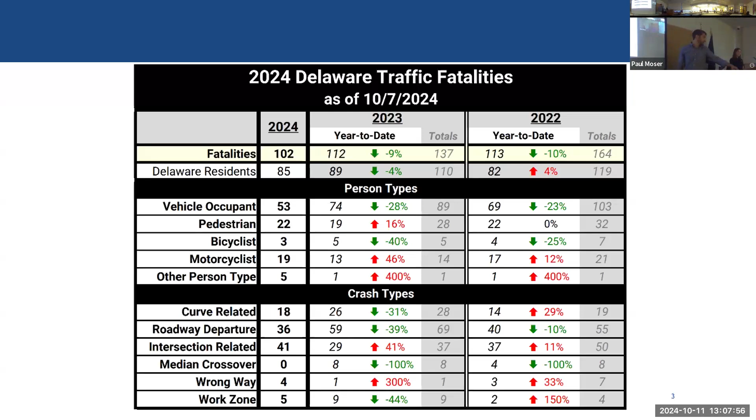We've had 102 fatalities so far this year, which you could say is down 10 from previous years, but that number fluctuates. It's still 102 people who didn't plan on dying or being seriously injured or maimed, just going about their daily life, and that happened as a mix of human factors, social factors, and our transportation network. So what we're trying to do, especially with plans like this, is think about what we can do in the infrastructure realm to not just focus on reducing fatalities and serious injuries, but even smaller crashes and things that can make people's lives better.

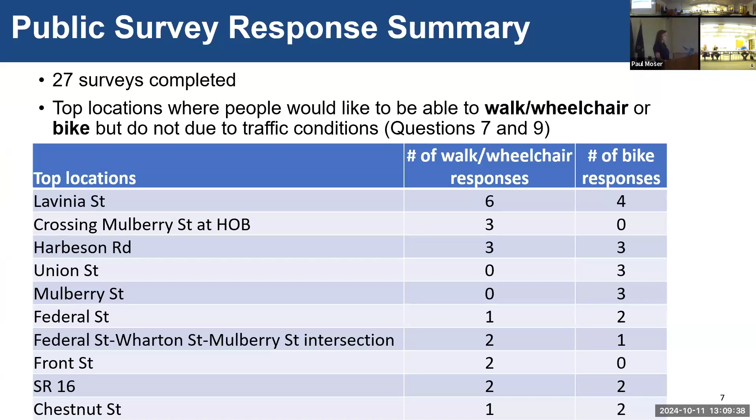Here is some of the other feedback we got from the conversations at the workshop, comment forms, and the more open-ended questions in the survey—some of the more frequently mentioned topic suggestions. A lot of concern about traffic speeds and wanting traffic calming was our top issue.

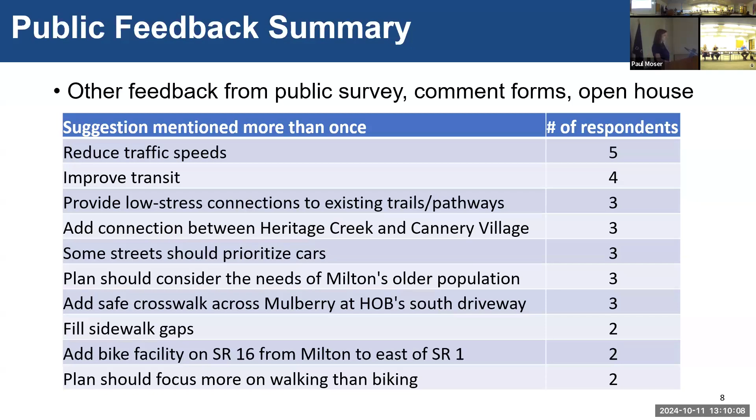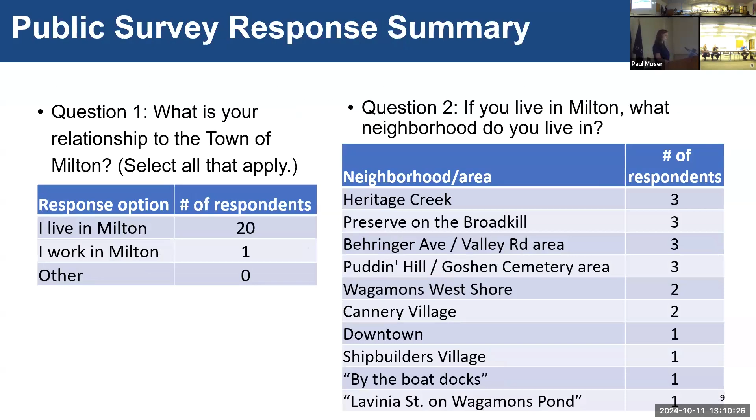We are going to be posting this online, so I'm not going to go over all the survey results, but you guys can look at them on the project website. I have the rest of the questions laid out here, but I'm just going to go through them—if you have any specific questions we can look at them, but otherwise, for the sake of time, we'll skip over them.

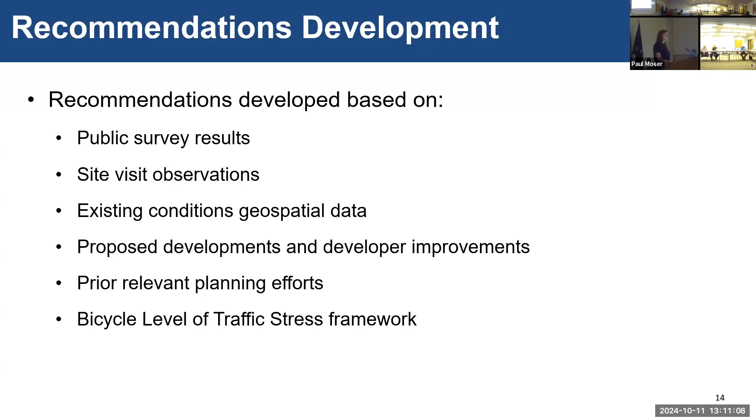So, as I mentioned, since June, we've been developing recommendations. Those recommendations were based on the public survey results, site visit, geospatial analysis of various existing conditions data, such as level of traffic stress, which we talked about last time. Proposed developer improvements that are coming along with incoming development that relate to bikes and peds, and prior relevant planning efforts, and the bicycle level of traffic stress framework basically drives how we form our recommendations to make sure we're creating low stress systems.

With that, I'm going to turn it over to Leah to talk about some of the key terms. Thanks, Jenna. Who has a poll going on who trips first? It's not gonna be me.

All right, so key terms. We went over this a little bit last time, but before we get into our network map, just wanted to review what we're talking about. Last time we met, we talked about level of traffic stress, and basically that is a way we can assess how stressful it feels for any of us to bike on a given road.

Now, obviously, all of our tolerances are different, right? I bike often to commute, and I'm gonna ride on a busier road because I'm comfortable with that. But what we want to ensure is that most people can use the bike facilities we're proposing. And that means we're going to err on the side of more protection so people feel safe.

Now, we may hear from your neighbors, residents, well, yeah, I live on a neighborhood street, but speeding's really a problem, right? So it's a low stress street, except for the fact that I have cars ripping down my street going 45. And that's when we would come in and say, okay, maybe we need a little traffic calming to make sure that people are obeying the speed limit, right? Because we can't have police on every corner making sure people do the right thing.

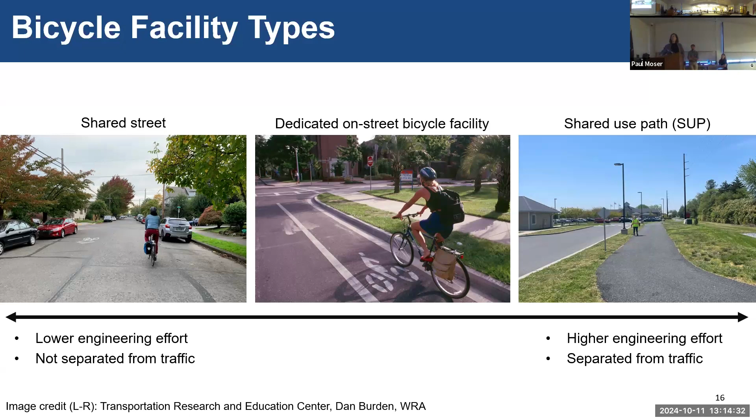And ideally, over time, that'll mean less car trips and less congestion, and easier to get around using alternate modes.

I mentioned low stress streets. There's a term we use called a bicycle boulevard, and that's basically how do we take those existing quiet neighborhood streets and make them a little more attractive or a more logical route for people. We'll talk about some places where that makes sense, and again that may not mean much other than some pavement markings, signage, and traffic calming. So we're talking about low intervention, quick build, easy to implement, inexpensive stuff that you can build on what you already have, because a lot of this town is already in pretty good shape.

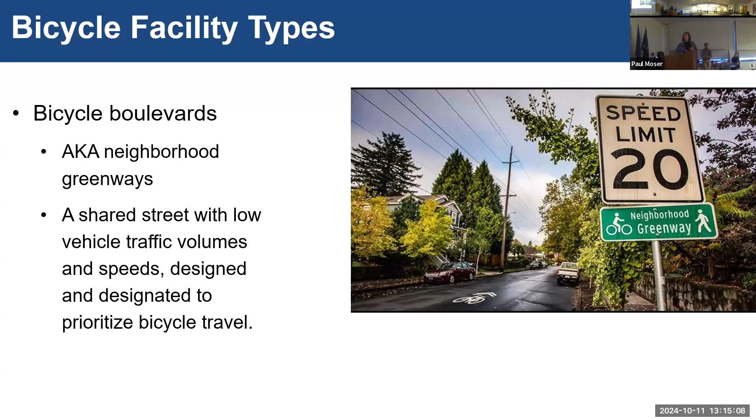Yeah, and you've done a lot of work in this space already. Both the state has a traffic calming manual, and the traffic calming advisory ad hoc committee put together a report, so there are tools in the toolbox we can use. There are tools that with Paul and his team's support at DelDOT we can explore that would be logical, appropriate options. Obviously we have a lot of state roads here, so we'll be working with DelDOT traffic and also maintenance and operations. We want to make sure that what we're building is able to be maintained over time, and able to be, you know, plowing is always one of those things.

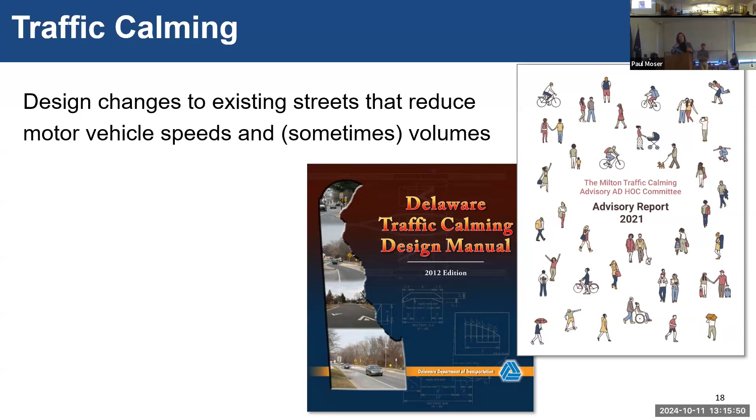So I'm glad to see there are some folks today from the town to speak to some of that. Now again, our goal here is not to make things inconvenient for cars, it's to make things safe for everyone, whether you're driving, walking, or biking.

Randy, you were sharing you had a near miss. I think we've all been in situations downtown, even coming here - one car flew right past us on the sidewalk, on the crosswalk, while another yielded nicely. But how can we work together to make sure people are more compliant, slow down, and respect everyone else in the street? Really, the reason we want to slow down traffic is safety.

That bottom chart there, I think, is really important. Now hopefully we don't have too many people in town traveling at 58 miles per hour, but when we're talking about those high speeds, even above 40 miles an hour, there's a 50% chance you're going to die if you get hit, if you're on a bike or walking. And that force of a car striking at those speeds is huge. But if you can get those speeds down closer to 30, and ideally even below 30 into the 25, 23 range, that's a lot better.

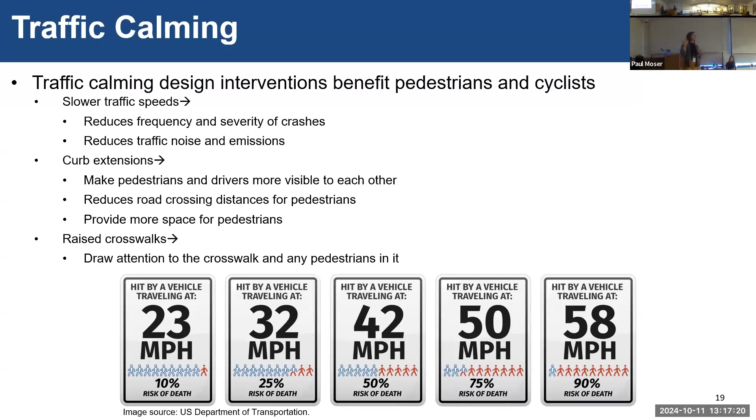Now this is an average, right - for people who are old, it's worse; for people who are young, it's worse. This is kind of your average statistic for risk of death. But again, Paul spoke to the state's statistics - this is a major effort statewide to make things safer for all of us as we're traveling on our roads. And one other thing we don't think about: it's a risk for those of us walking and biking, but who of us who drive, which is probably everyone in this room, wants to live with the burden of having seriously injured or killed someone on the roads? There are ways, things we can design, to reduce the risk of that.

So, talking about some improvements at crossings - that's going to be a big part of the challenge here in town. You may be riding or walking nicely along a quiet neighborhood street and then you get to a busier road. So how can we make those crossings safer? You've already done some of that in town with the artistic crosswalks and some other things, but there are other tools we can use strategically. Your local expertise on where these things may be necessary is going to be really important here.

Including high visibility crosswalks - you can see a raised crosswalk, kind of a speed table, there. More of a traffic signal light situation, or a rectangular rapid flashing beacon on the bottom, which may be appropriate where there's not a traffic signal already, or at a mid-block crossing location. And also a more physical change - curb extensions, which you see in the center of the screen there - whereby at the corner you're in a place where you shouldn't have on-street parking anyway, because you're so close to the intersection.

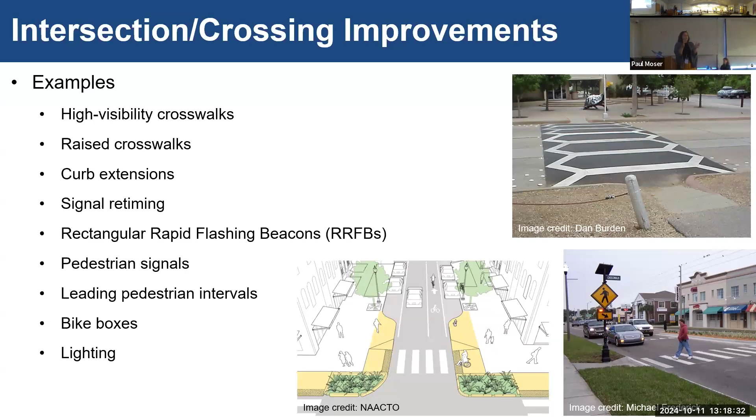You can actually build out the curb there to reduce the crossing distance and slow cars down as they approach that crosswalk, because the road tightens up a little bit.

So these are some of the tools in our toolbox that we'll be talking about moving forward. We don't want to do this in a vacuum, or like it isn't going to take something to build and maintain over time.

This is a map depicting maintenance responsibility. Red streets are the state's responsibility, green are the towns', and we have one little piece that's privately held. As we talk about what's appropriate for each street, we'll be dealing with local forces or coordinating with state operations and maintenance to ensure what we're doing works for everyone involved, with the understanding that money is tight across the board right now. We'll talk later about grant funding and sources of funding for some of these things.

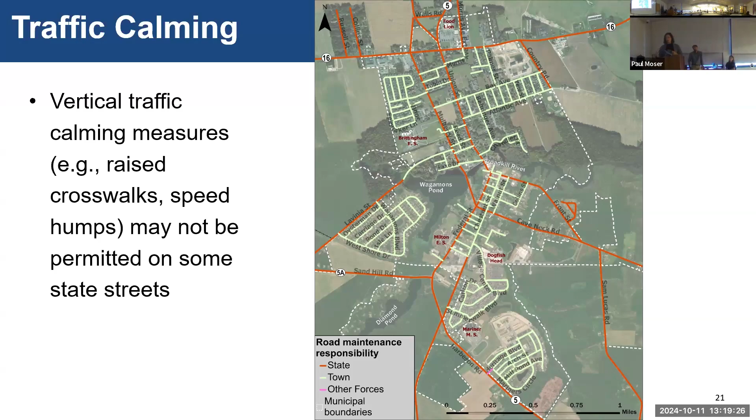And with that, I'm going to hand it over to Paul, who is going to speak to our preliminary recommendation.

So what we're going to present on today is not necessarily project specific. We'll be presenting very project specific details and concepts at the first public workshop in December. We're still kind of working on those. What we're going to talk about today is more of a broad framework we've developed for this analysis.

This framework is geared originally towards cycling. You'll see we talk a lot about cycling here, but there's also several pedestrian oriented recommendations, and they overlap almost completely. Most of the places we're recommending some sort of cycling intervention would also be beneficial, or explicitly have some other improvement, for pedestrians.

So we use this framework of level of traffic stress, looking at low stress streets and seeing how do people get around, how could they get around, and what are the deficiencies in a complete connected network?

So we came up with this theoretical framework saying this could be a connected network for cycling around the town of Milton. All of these lines you see here are colored based on having a link that goes all the way up or down, essentially forming out a grid.

Because travel is pretty random - people from somewhere want to go somewhere else. It's impossible to actually plan where they're going to go. So the idea is we want to develop over time redundant travel options for people to get around town. Each of these would represent a link in the grid that long-term would have some sort of lower stress bicycling facility or countermeasures for traffic calming and pedestrian safety.

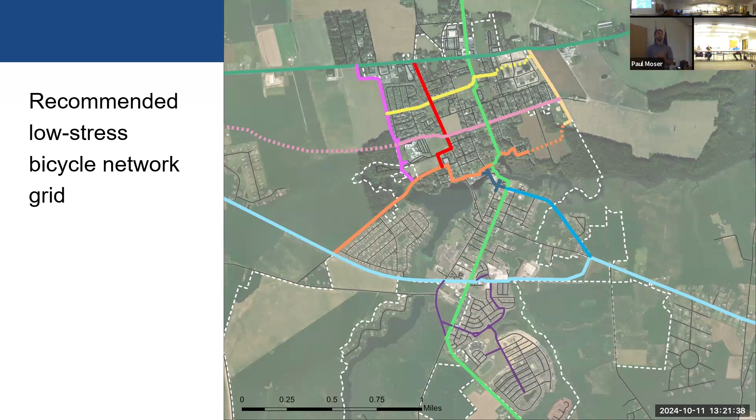So we're going to go into a little more detail and highlight a couple of these different things, talk about what they look like, get your imaginations going. This isn't exclusively what we're recommending - we have a couple other project recommendations that aren't part of this grid, which we'll go into at the public workshop. We're also looking for feedback from you guys on other specific things to hone in on. We got a lot of feedback from the first public workshop that we're going to incorporate.

But before I move on, does this concept make sense to you guys? Do you have any questions about this or what we're trying to convey here?

Yes, I see what I think are broken lines, and there are areas that indicate there are no existing roads, but generally private property. Yes, speaking about the private property.

For sure, so that was for future development scenarios, right? As you guys know, there's a ton of development over on the northwest of Milton. That's going to be, I think it already has plans in plan review, right? So if there's an opportunity to coordinate with the town to get connections to that new part of town, you now have a low stress route to access those land uses for people inside town. So roads here actually on the east side of it.

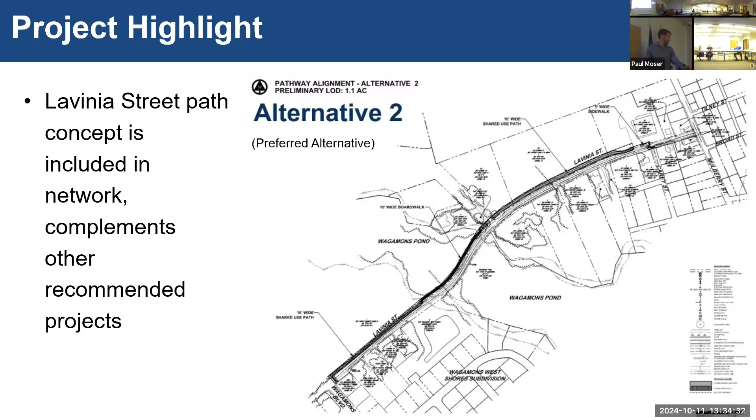Yes, Leah? George, we have you, I see you raised your hand. You want to come off mute and share? Yeah, I do have a question.

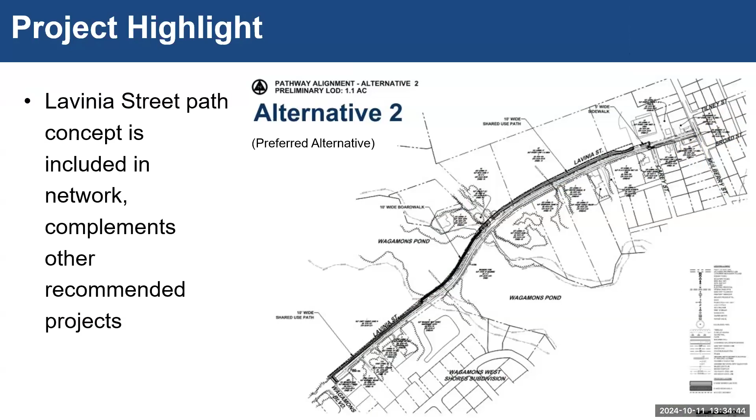On the map that shows the potential bike paths, it doesn't seem to be connecting to what would be the generators of bicycle use - the schools, the parks, well, perhaps the parks, but the shopping center, things of that nature. I mean, the things that generate a bike trip.

Yeah, for sure, the things that need to be connected by a bicycle network - and I'm not really seeing that on here. Yeah, George, so this was more of a grid concept versus the local connections. I'd said earlier that there's going to be other project ideas and recommendations that are more specific, but this was kind of the easiest way to communicate this concept. We're eventually going to map further towards the development of this plan that's going to have those specific connections.

To some extent, the idea is that a lot of the local roads are perfectly fine to walk or bike on. They have sidewalks, they're pretty low traffic speed. Really, these are supposed to act as the connectors across town. These are like the collectors in a sense.

We didn't want to say every single road is part of this. It just gets overwhelming, so this is kind of a distilled version. It's more of a schematic, if that makes sense, than the final plan.

Ultimately you'll show some kind of connections from this grid pattern to what actually is generating the need for the trip, like the connections to schools. Now, some of these we're gonna have pretty detailed concepts for, but a lot of the other projects are gonna just be like a point that says 'improve intersection at Milton Elementary School,' that kind of stuff.

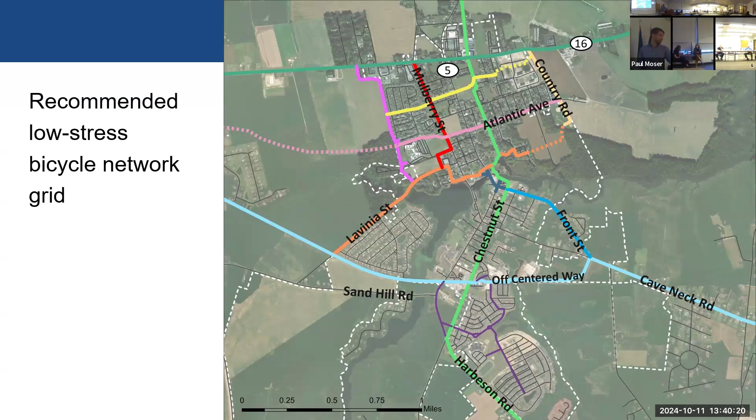Thank you, George, for that point. Okay, let's keep rocking.

So Lavinia Street is a project that already has a concept developed. One of the ideas, and this is one of the higher end engineering effort ones, was Mulberry Street. Obviously Mulberry Street and Union Street are high traffic - Union Street is very, very tight. Mulberry Street, just from first glance, it looks like where the sidewalk is on the southbound side, you could probably fit a much wider pathway that has a buffer versus just a regular 4-foot sidewalk. You could do some improvements to some of the intersections, and that could tie in on the bottom to the proposed project at Lavinia Street, come up to the school, and then get you up to the shopping center. Again, a relatively expensive project, but that's kind of what my section does.

We spend a lot of time and money on this exact kind of project, taking places that are sometimes 2 or 4 lane roadways and putting these 10-foot asphalt pathways next to them, sometimes 12-foot. They can make a big difference for both safety and people's comfort on those roads, making it safer to bike and walk. I'm doing a $12 million project like this in Dover right now. The state DOT and US DOT do allocate funding for these kinds of projects, so we see it as a very big functional improvement. That's one idea - probably the most intense project on one of the major roadways, but it could be an improvement.

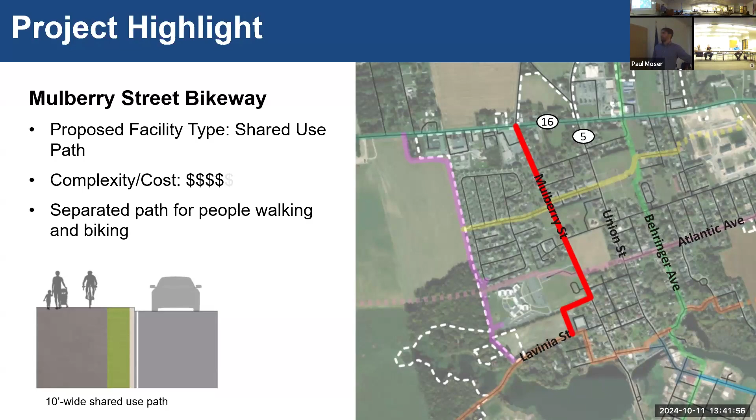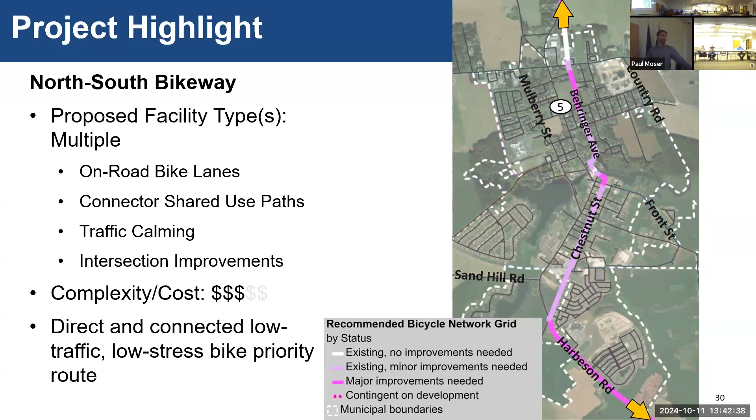Again, the sort of bicycle boulevard - if any of you have a fun name for this, we just have 'north-south bikeway' which is kind of dumb. If you guys come up with a nice way to brand this, it could be a really fun thing to have a name for. Maybe you have some dedicated sheet aluminum laser cut branding things on top of their street blades that are really cool - I'd like to have a name for it. There's all sorts of different things you can do. But yeah, it's the bicycle boulevard concept like we were saying - we already have a street that people are using. Let's connect it, make it safer, make the intersections better, make it more direct, and really focus not on just trying to put in a new facility, but trying to leverage what's there.

I think these are the more intense things. You want to talk about this? Leah put this slide in. I was gonna put this slide in.

Okay, so we talked about traffic calming a little bit earlier, right? I know some of you are very familiar with what traffic calming means and what kinds of things you can do, and maybe some of you, especially those online, less so. So this is just a high-level diagram from an organization called NACTO, the National Association of City Transportation Officials, that shows some of the things. I think what people think of most when you say traffic calming is a speed bump or speed table, in the upper left there. Now, we're getting into maintenance stuff, so what we can and cannot do on any road may differ, but another thing you can do is what's called a chicane, in the upper right there, which basically, instead of a car traveling straight down the street, they have to deflect. A speed bump is a vertical deflection - you're going up and over, and that's slowing you down. A chicane is you have to stop going straight and slow down to turn a little bit, right?

And similar concept down here on the left with the median island. Again, it just interrupts that straight free flow. Mini traffic circles have been very effective in some neighborhoods and can be pretty low cost. So for those of you who do not exist in the transportation space all the time, I wanted to provide a couple examples. Versions of these things exist in the Delaware Traffic Calming Manual, as well as the city's traffic calming committee's work, but this is just a highly graphical way to quickly show you what kinds of things we're talking about.

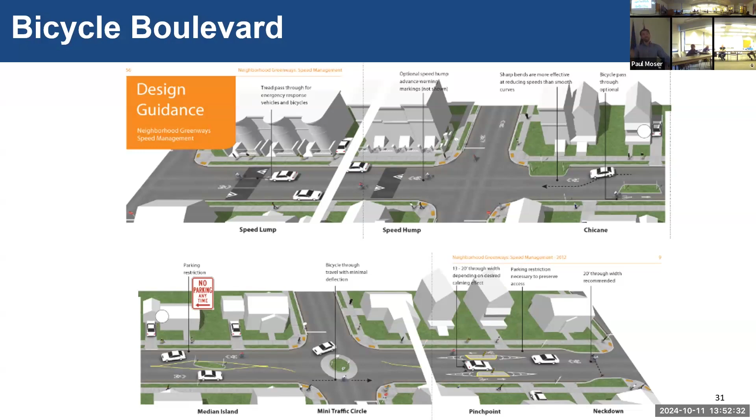So those are very successful. We have a spectrum of design, from really restrictive and effective traffic calming to so permissive it's almost worthless. So it's really about where you want to be on that spectrum, and making sure whoever's designing it is competent enough to do it and doesn't accidentally cause an issue like that.

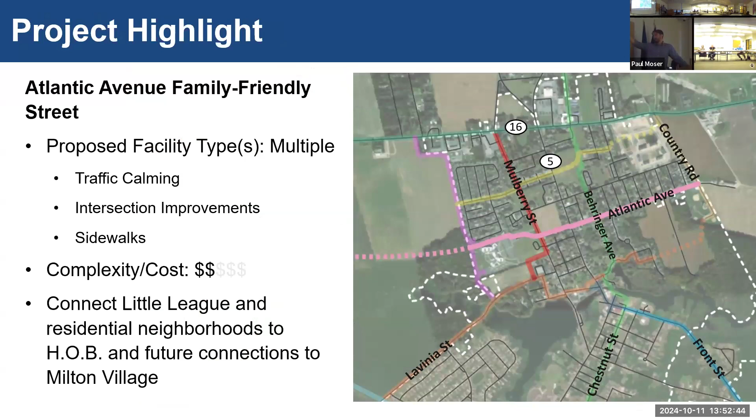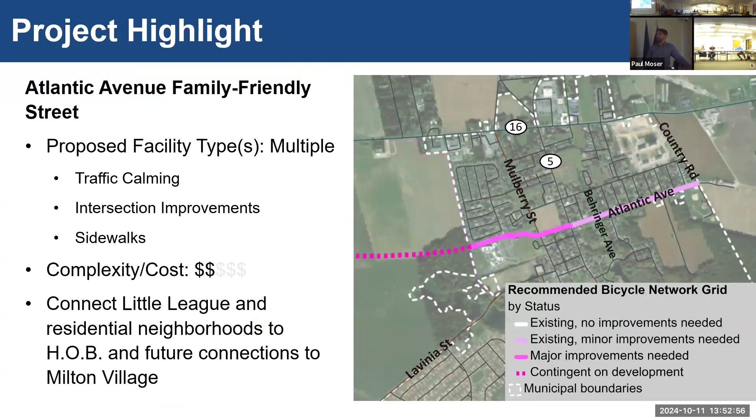Atlantic Avenue, this was one that was identified as a street that we wanted to make better for kids and families walking, especially because the Little League is over there, and it connects to the school, and then perhaps in the future, if there's an opportunity through development, connecting to the other side of town. So really, we had in mind for this exactly what we're talking about right now.

As you guys know, Atlantic doesn't have sidewalks in some places. It's a little bit of a straightaway, right? Cars go very fast sometimes.

So the idea would be to set up the intersections to hopefully have some traffic calming, get speeds down, make the crossings more visible, and try to make this as much of a low speed environment. It's kind of an overlapping concept with the Behringer and Chestnut Street option, where we want a corridor prioritized for people walking or biking versus for automobile traffic.

Because realistically, how fast do you really need to drive on Atlantic? It doesn't make that big of a difference if you're going 20 versus 30 when you're driving. You're on it for a couple of seconds to 2 minutes maybe. So we see this as a great opportunity to prioritize the low speed, family friendly environment over a higher speed roadway.

Downtown traffic calming was something that was brought up a lot in the survey, and we hear it all the time. So we're not super prescriptive at this point in time, but some sort of traffic calming through this area.

It's a critical route, right? It's a primary snow removal route on Union through there, and that intersection is quite important. So there are trucks that go through there. I know that's not something that you guys like per se, but they end up there.

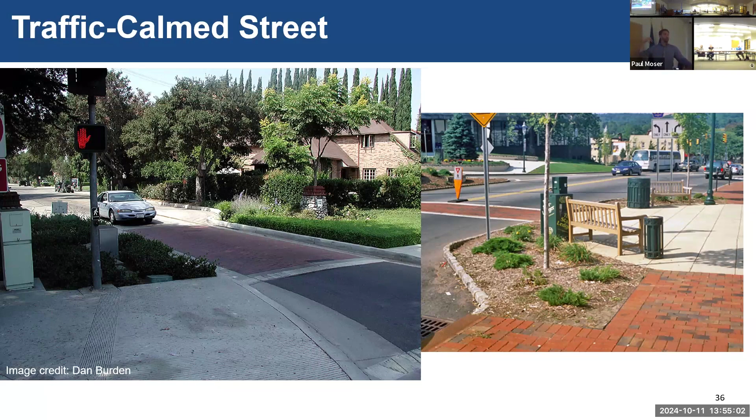So we're not really saying exactly what these things are. If you guys want to talk about this in more detail, we'd love to. I don't know how prescriptive we're gonna be with the final recommendations, but we identified this core area as something that could be a fantastic town center traffic calming effort.

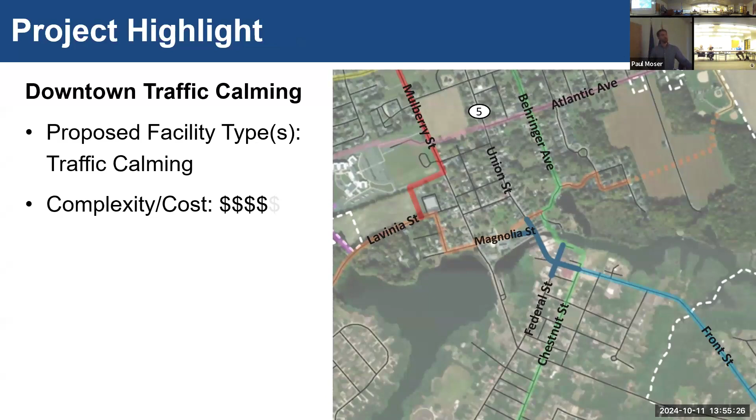So if this whole area had a similar treatment at all the intersections through the roads there, it could change the nature of that area and really make it very clear, not just by the land use and what you're driving by, but the roadway would be different, the intersections would be different, to create a different environment. So that's one of the recommendations as well.

I was forgetting. Heritage, okay, that's it, sorry. I'm bad at subdivision names.

Basically to have an alternative way to get to Route 5, which I think you can already do this, right? If you want to walk on the grass, maybe trespass a little bit. So this kind of behavior is probably already happening. Really what it is, is formalizing it, setting up a more dignified and usable facility for people doing that.

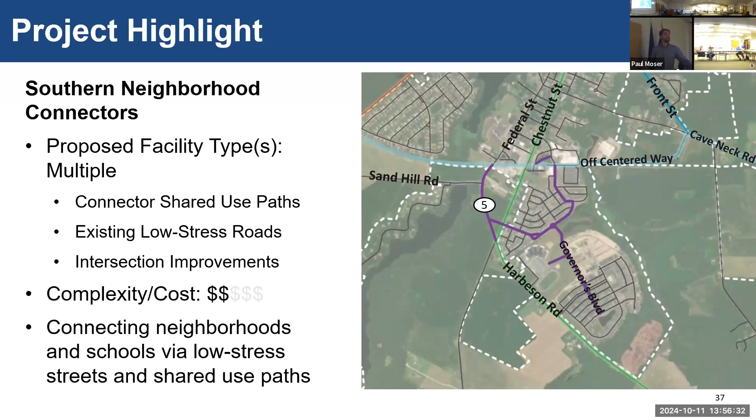Again, existing, not existing. So this is just a little thing to illustrate the value of these kinds of connections, right? Like you could say, yeah, just walk across the grass, it's fine, it's not that big of a deal.

These little connections between subdivisions or connecting existing roads can make a big difference in people's travel times or travel behaviors. For instance, if you live in the middle of a subdivision, maybe you weren't gonna walk across the grass for some reason, or say you had a wheelchair or something like that.

Basically, the alternative travel route is to go up Route 5 and then back up, which is quite a long walk or bike ride compared to if you were to just go straight through, right? It's almost 3 times longer. So providing these little shortcuts can improve not just travel times for people on these local trips, but it can really tie the neighborhoods together in an intimate way that more people would be comfortable doing.

I've met a couple of people who live back here and it does sound like it's a little bit of an island in some ways. So this could be a nice way to tie it together into the rest of the town on the low stress, low volume streets.

So you're talking about putting in a connector across the school property? Yeah, like a little trail or something. No, it's not school property. There's a 60-foot path across town, 60 feet wide, about 300 feet.

In that particular drawing, it's my understanding that your agency is going to install a roundabout at the intersection of Shingle Point and Chestnut, but that doesn't reflect in your alignments at all. In fact, I see a white line I don't recognize across there between where all the colors are, and over there's a field. There's a field there right now.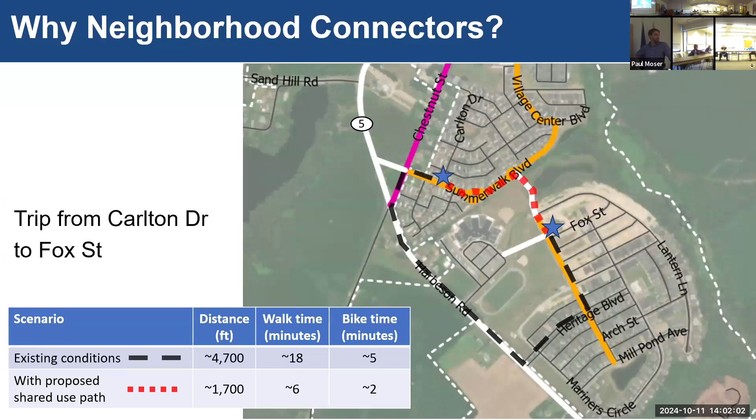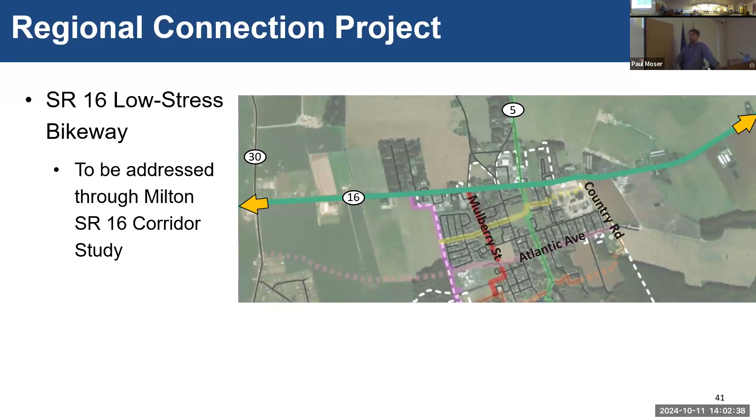Yeah, I agree. And then 16, right, Austin's here for the forthcoming 16 study. We're gonna propose some kind of bicycle, low stress cycling infrastructure on 16 as far as our project goes. We think it's gonna be very valuable in town, especially as more development comes on the western side of town and the new townhomes there, and on the northeast side of town, really just trying to make this safer. I think the vision for that corridor is gonna come out of this other plan, but we also want to echo it as a valuable link in a low stress cycling network and a pedestrian network through town.

We have a little bit of time to talk about regional connections too. One of the regional connections we've talked about for a long time is the Milton Rail Trail. This was sort of considered by DelDOT a long time ago. We did phase 2 a couple years ago to go to Lavinia Street, and it's been broken out into 3 other phases. Phase 3 would be another rail trail project where the actual railway is taken out and a trail is put in. Anything beyond there would be a trail next to the rail, like we're doing on the Georgetown to Lewes project leaving Georgetown, which is a lot more expensive.

I think it would be great to take that all the way to Ellendale, but it'd also be nice if you guys could think about what is the most important terminus to you all. I think that would be really helpful in prioritizing the recommendation for the development of this corridor this time.

Excuse me? Disembodied voice. Okay, this one's fun.

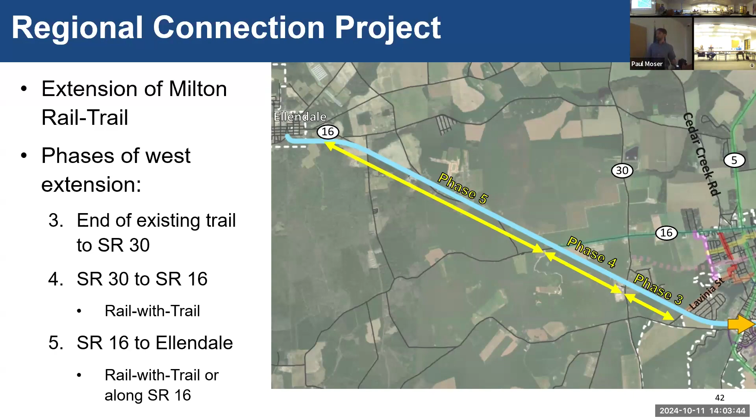Now I'm trying to figure out how much actual thought went into that, and were they talking to property owners, or what was their environmental analysis? Really what we want to do is try and get some of those stakeholders back in a room, figure out how mature this concept is, does it need any changes, and then perhaps recommend a preferred alignment to include in this plan, such that we can actually think about long-term funding something like this to connect with the Georgetown to Lewes Trail.

So this is kind of going to be our starting point, but we're going to be doing a little bit of workshopping, probably over the next couple months through the winter, to reevaluate this concept and then include something in the plan as a recommendation.

We have a hand up online, but. Mayor, okay, just looking at. Thought I saw some emoting over there.

Yeah, it's DJ again. I think that this connection to the Lewes Georgetown Trail is more important than making a connection to Ellendale, just because the connection to the Lewes Georgetown Trail gives you a lot more options of where people are going and their end destinations. And right now there's just no safe way to have access to that trail without driving to one of the kind of makeshift trailheads on the west side of Route 1. So Walker Road is already there, I think that road is a pretty good road to use. And it looks like the red portion that connects to Route 9 must be going through the Freeman communities.

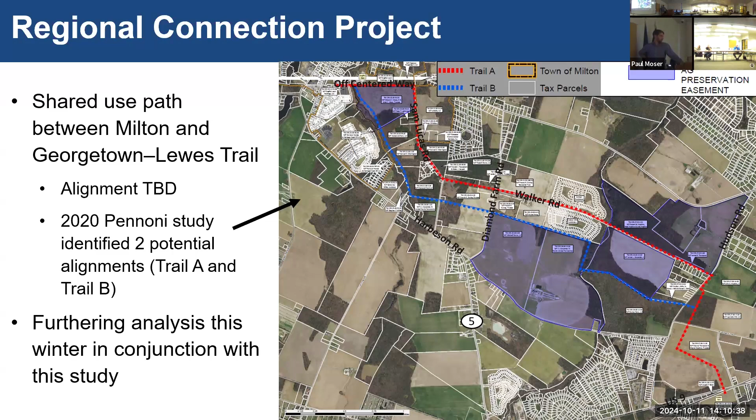It was just, as most of you who work in this space know, if it's not in a planning document, if it ever does become ripe for grant funding, you're not getting it. So we included it as a low priority item, and that Ellendale staff person did support it. It was not a passion project of theirs at the time, and again, that person has moved on.

Okay, and then, you know, in the Lewes Bike Plan we did recently, that was with the Lewes Bike Ped Advisory Group. They had all these other non-project related recommendations. I'm coming from DelDOT, so I'm very project oriented, but if there's other things you guys want to include that are meaningful to you, especially from the town, let us know. We reached out to Christy about this previously, but if you all want to include anything, we're open to it. But again, maybe it comes down to what you want to use this plan for. Is it something the council is going to approve, that the town wants to use? Just consider that, and then implementation.

There's a lot of ways to get these things done. A ton of money is spent on streets, roads, and capital projects every year. Obviously, in DelDOT years, which isn't human years, it's like the opposite of dog years, but there is money and opportunities available to make these things happen, especially when you have goals, priorities, and a list of what you want to achieve.

One big thing—I know Milton got awarded Safe Streets for All planning funds. So if you included that low stress grid as a priority in your Safe Streets for All plan, you could use that money for implementation. That's one way you could start getting Safe Streets for All funding on the ground for those projects.

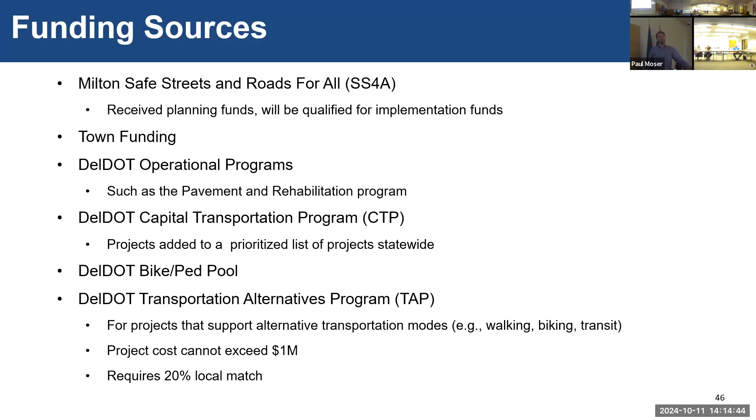Yeah, but Safe Routes to School is currently not doing projects, which is sad. But previously, Safe Routes to School was a cutout of Transportation Alternatives where the state would fund the 20%. So we would do these projects oriented towards improving basically walking conditions around schools. It's a cute program. CTF, Community Transportation Funds—your legislators have access to this little slush fund every year to spend on whatever they want, as long as it's within a publicly dedicated right of way.

Very helpful program for getting small things done, and that can be the 20% match for those transportation alternatives projects. Very helpful. That was also how Milton Rail Trail was done.

It leveraged transportation alternatives funds. Developer improvements, like DJ and the mayor were saying earlier, developers do have to make improvements in the roadways as part of their development projects through a traffic impact study. If you have this plan in place when they come, and you have a plan in mind for a road or an intersection, you can use that to request certain improvements in the state right of way. I don't know what it's like in the town, but at least in New Castle County has some pretty strong hand in what happens internally to the subdivision with certain things like this, so they can request internal improvements or connections.

Your agency will force connections because any new land coming into Milton is served by state roads. So that would be happening. But there's also, if there's stuff in town, some of these internal connections maybe could be part of the development coordination process, where those dash lines we talked about earlier, maybe you say, if there's ever development here, we want to have a nice, high quality, low stress connection here. It's kind of like with the dash lines.